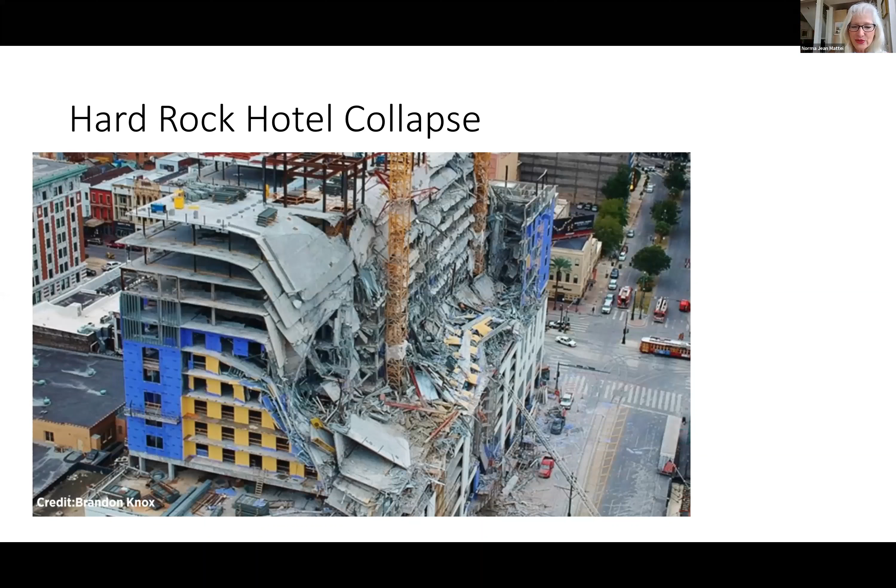So let's focus more on the Hard Rock Hotel collapse. Incidentally, just weeks after this disaster occurred in New Orleans, there was a similar construction failure. Both disasters ended with 3 people dead. It was actually, I think, Mustang Engineering's new headquarters in Katy, near Houston, a construction issue. I haven't followed it, but you really didn't hear too much about that failure, not the way that you heard about the Hard Rock failure.

And part of the reason why is it's in an area with a lot of tourists, and we all hold our cell phones up all the time. Tourists in particular are videoing as they're moving around because they're in a new town they're visiting. So this young man, Michael Del Mole, was driving down Rampart Street toward Canal. You see the Hard Rock on his left; he stopped at a red light. He's got his cell phone camera going, videoing his drive along the edge of the French Quarter. And he just happens to be driving at just the right time.

So let me play this video for you.

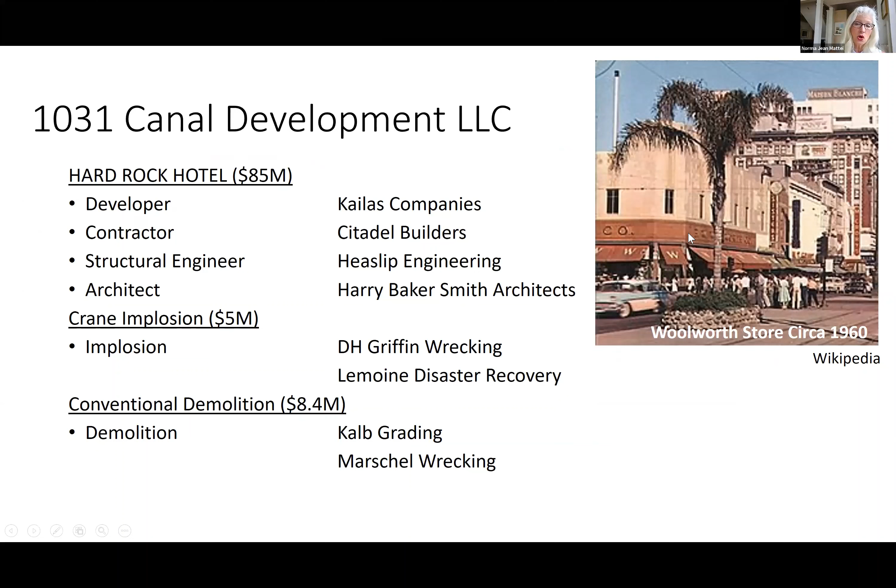And so 1031 Canal was going to be 18 floors, oh, I'm sorry, I said 160, it's 190 foot tall. 350 hotel rooms, over 12,000 square feet of event space. And the lower 7 or so floors was not steel, but reinforced concrete, a very different construction framing system. And that was the 400 parking spaces, some retail space on the first floor, and they were hoping to get a major restaurant on the prime first floor square footage.

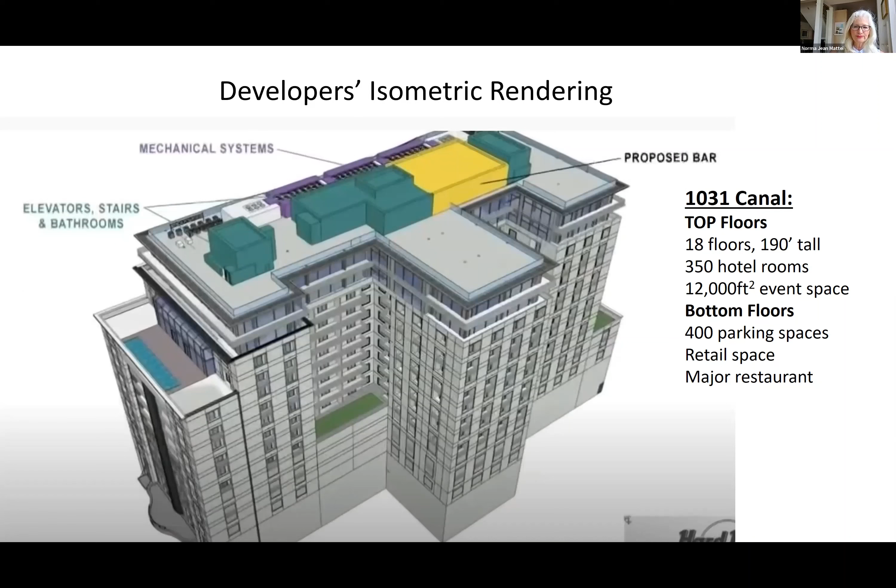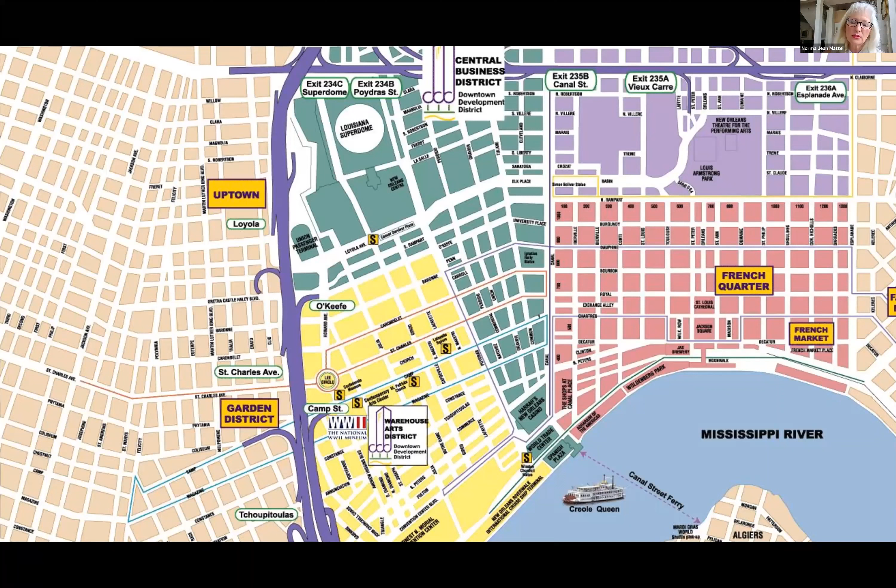And the historic preservation requirements are relaxed in comparison to those of the properties within the French Quarter that don't butt up against Canal Street. So there were some complicating factors in this location. So this happened in October. So we're dead in the middle of heavy convention season. And this is pre-COVID, because it was 2019.

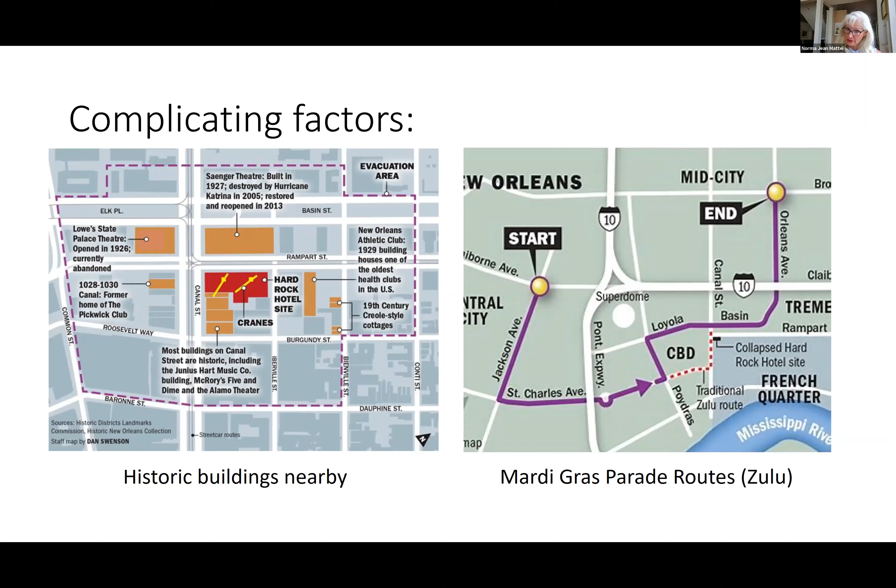So at the time of the collapse, there was a major production of Cats. It was running two weeks. So it had run the week before, Friday, Saturday, and Sunday. And the collapse happened on a Saturday morning. So thank goodness it did. If it had happened on a Sunday morning, we would have had the last matinee for Cats.

This posed a challenge because the collapse occurred on the Rampart Street side, and the Saenger Theater was shut down. So the second half of the Cats production was not able to be completed. And all of their sets and costumes were within the building. And they had to move and go to Atlanta for their next production. Ultimately, they were able to access their sets and costumes, but I'm sure they were really under the gun timing-wise, so that they could maintain their schedule for the rest of the year.

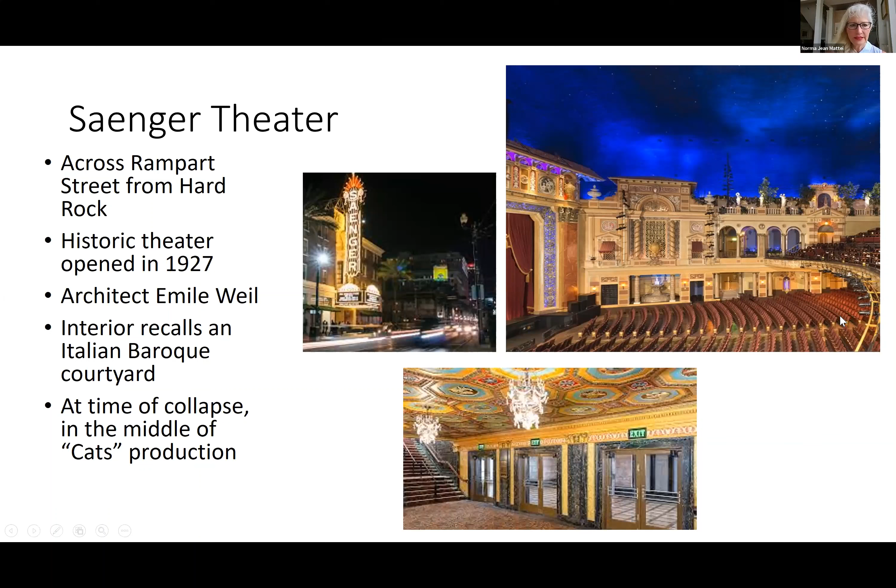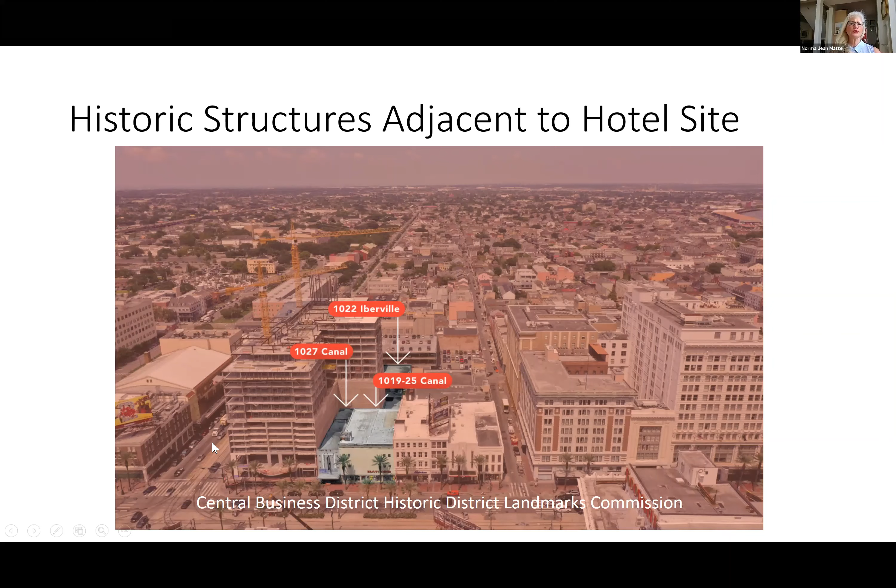And so October is well into our hurricane season. In fact, we're what, June 8th? We started June 1st as our hurricane season. It doesn't really end until November. And even though late August and September are typically the months that we see the most activity of major tropical storms and hurricanes, you can actually have a hurricane in October.

In fact, I got married in 1985, the tail end of October, and it was, what's the date? October 26th is my anniversary, and we actually had Hurricane Juan. So yes, we have hurricanes that can hit the city. Even storm fronts can bring with them associated high winds.

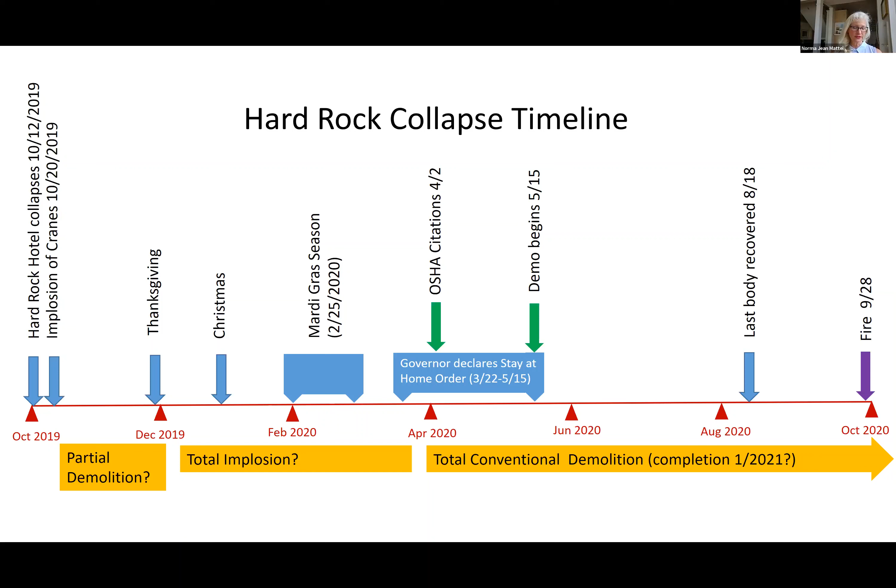The building is back in national news because there's a fire of construction debris. I do have a couple of photos. And then the January finish of the demolition is pushed back due to bad weather to March of 2021. And actually it was pretty close. It was the tail end of March, probably the first week of April, when Canal Street and Rampart Street were totally reopened, and you could walk up to a fenced area and just see a leveled site. So this is a picture of the cranes after the failure.

Let's first now talk about those cranes. So there are 2 tower cranes. They're out of the Morrow fleet. They're Liebherr cranes. One is 270 foot, one's about 300 foot. The east one, which is the one on, where's my cursor?

I'm losing it. Where'd it go? That's the only bad thing about a white.

Okay, there it is. So the eastmost one you see here, it's the one on the left side. The black line is totally upright, and the yellow line shows how much the crane is leaning. The other crane, a little bit shorter, it's on the Canal Street side. It is not as damaged, but it is swaying and damaged somewhat. So it's decided to take both of these cranes down.

The major cause for concern is, even though the cab is pretty heavy, those counterweights. So on the short horizontal piece, these counterweights run about 50 tons. So they're way up high, not easy to access, and you've got something extremely heavy that's just waving in what possibly could be high winds from a storm front, a tropical storm, or a hurricane. Let's get these suckers down fast.

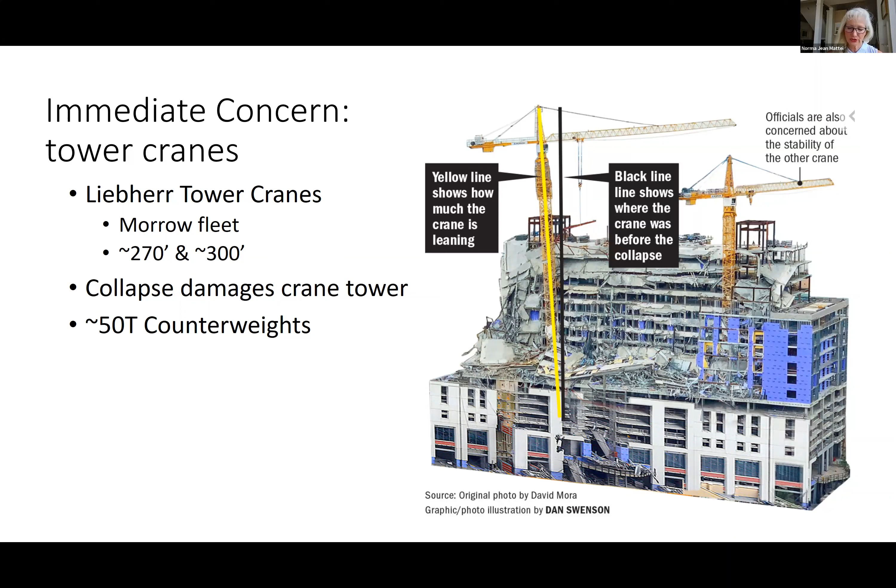So it took a lot of logistics to ensure that people were not outside. You warn people, but some people, especially when they are sitting on a rooftop bar in a hotel fairly close, are going to want to have their hurricane and watch the implosion as it occurs.

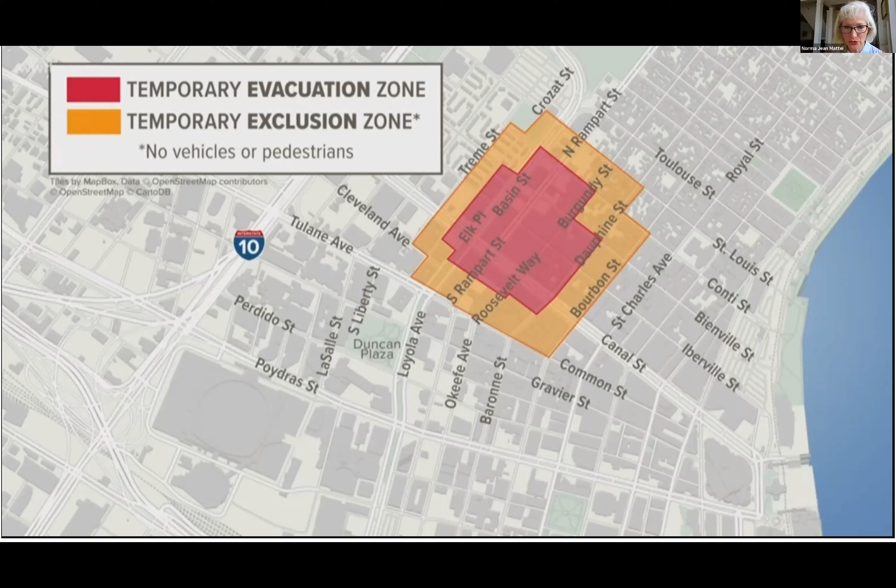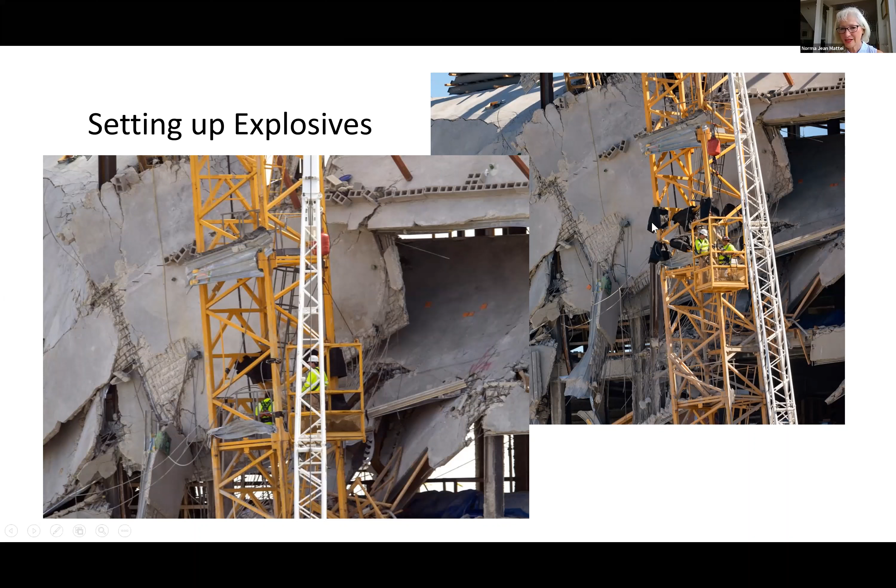These black packets, those are the explosives. So those guys are hanging from a cage next to a building that has collapsed, putting explosives on crane towers that are damaged. This is a little bit better of a photo. So here's the cage, the gentlemen that are in the cage, not on the tower crane, placing the explosives.

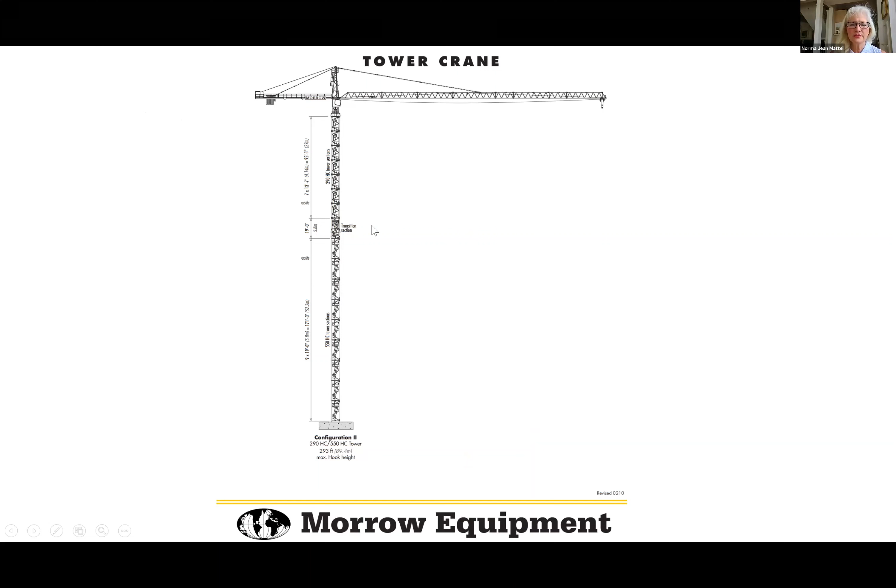So let's see where they put those explosives and see what the thoughts were. So explosives here and here to disconnect these tension members. This is a pin here right at the cab. So disconnect these because they wanted to make sure this counterweight came down, and this part's supposed to fold into the tower. This is supposed to disconnect it. It's supposed to go down, just like folding your umbrella.

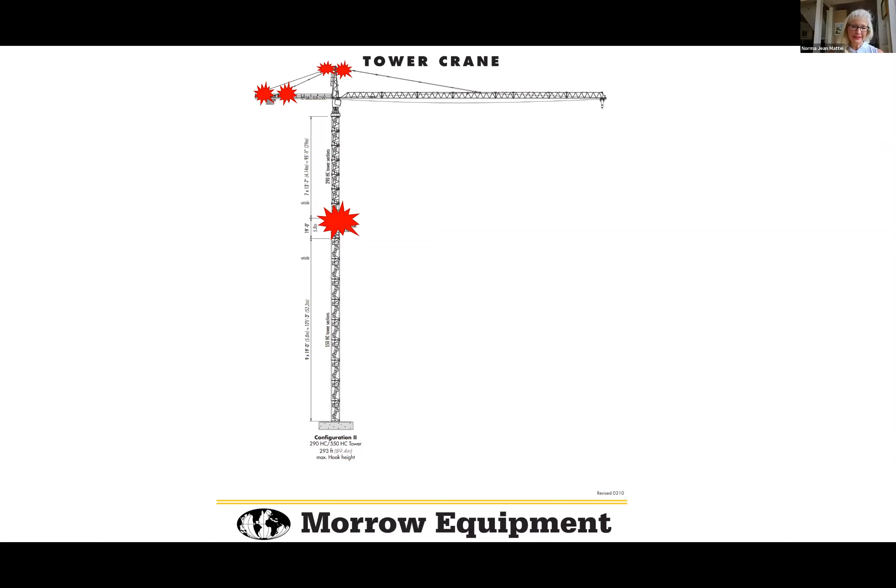I've got a video. It's going to run first from this view, and then it's going to switch and run from another view where you'll see the Canal Street crane, how its horizontal jib gets kind of caught up, hanging over Canal Street. So let's take a look at this video. It's a little long. So everybody's either glued to the TV or close enough to see, but safely, hopefully.

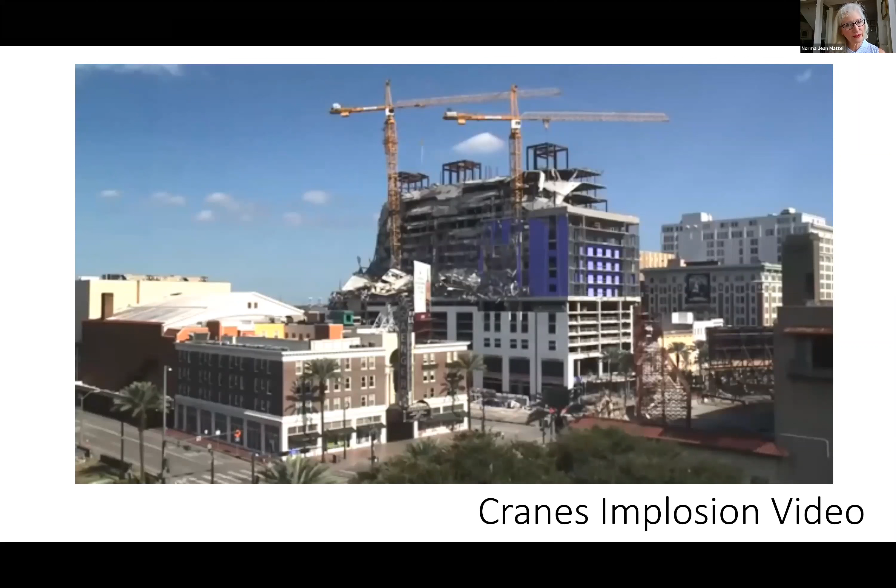There they go down. That's good so far. Oh, look at the east one. The top goes down as like a spear, and the Canal Street side, we've got this arm hanging, getting caught up on the moment frame on the west side and hanging over Canal Street. You'll see in a minute the implosion from that side.

So from a point of view of success, I think it's fairly successful. We've got the counterweights. They were actually flung into the building, so they caused more damage in an already damaged building, but you've got those very heavy counterweights.

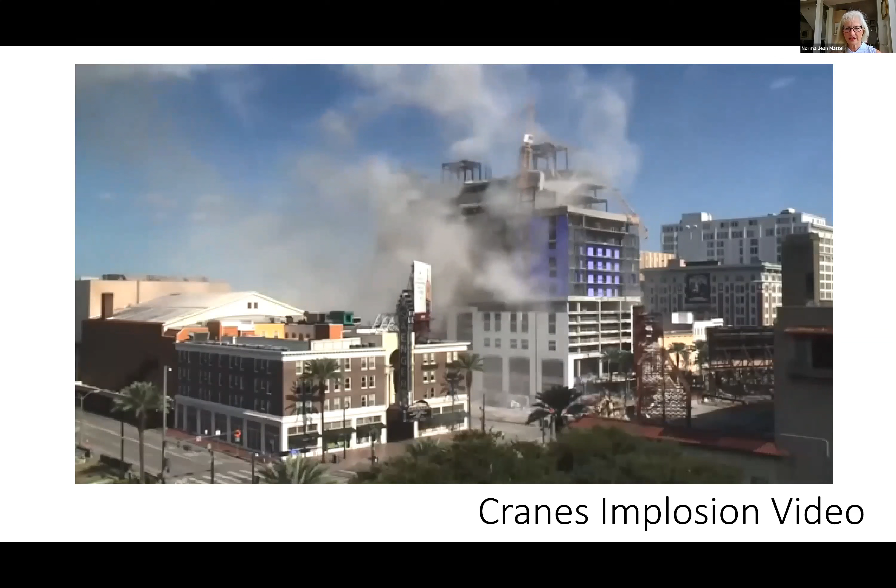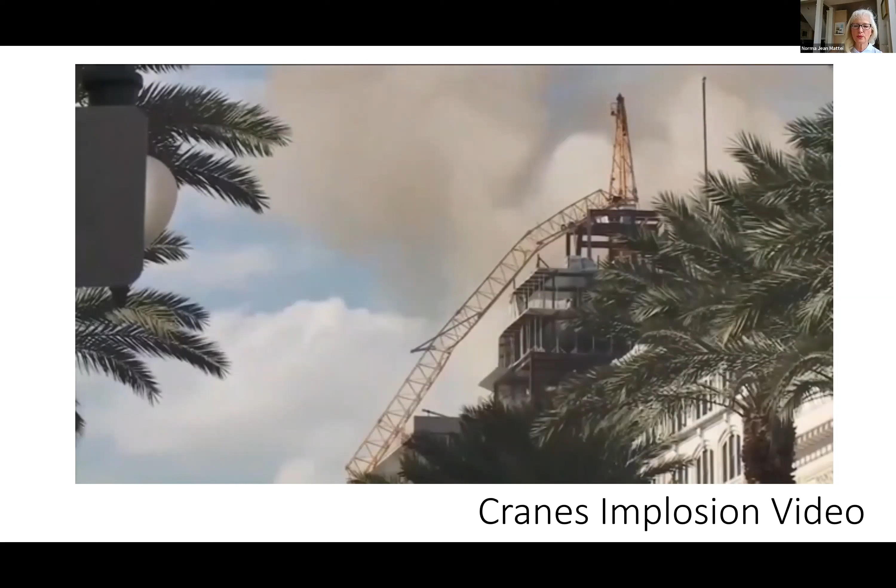So that's the Canal Street side. They did not want a lot of this to get hung up. They wanted those pieces to come down lower so that they could be chopped into pieces more easily and then trucked away to some disposal site, hopefully a reuse site.

So there's that westmost crane hung up on this moment frame of the steel framing, and this part is hanging over the building, over Canal Street, causing Canal Street to continue to have one side of it closed to traffic, and so that whole area is fenced off. So the area along Rampart Street and Canal Street, fenced off, no traffic still.

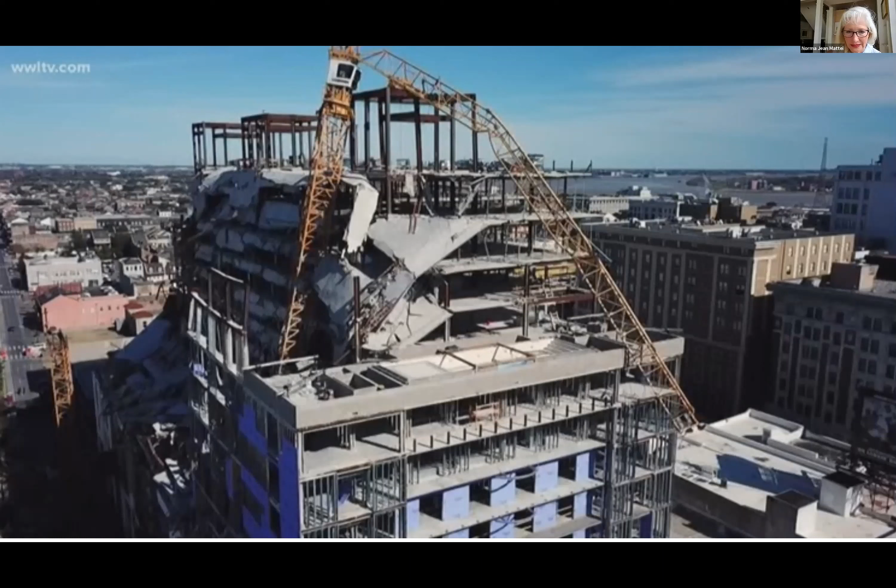So once it was decided to do an old-fashioned piece-by-piece demolition of the Hard Rock, the first priority was to carefully remove debris so that they could access the two remaining bodies of the victims that had remained for months in the site.

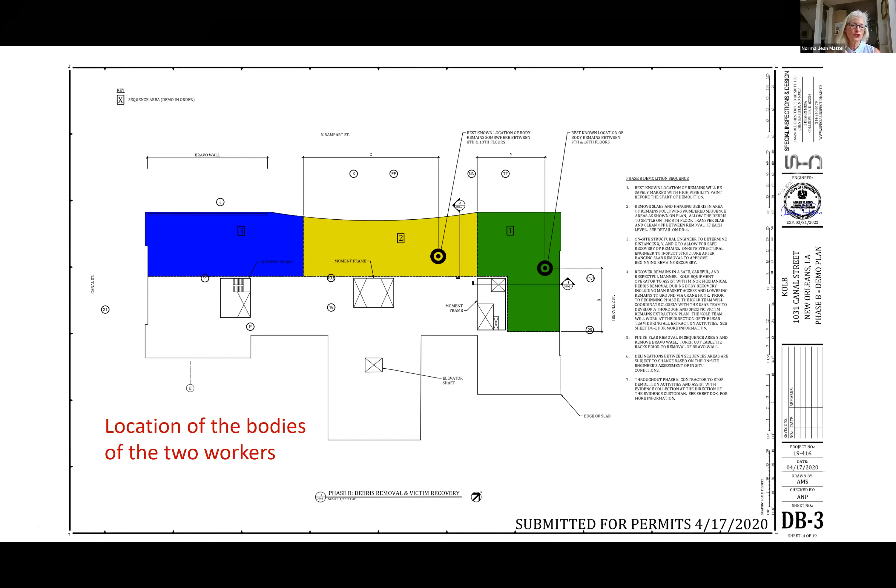So here's the Rampart Street side running at the top, and one body was located between the 8th and 10th floors, and another body on the 9th and 10th floors. So this one, they knew exactly where it was, but you couldn't access the body without removing so much of the structure, and it was deemed unsafe until they started demolishing the structure. The other body, they were not quite sure where it was.

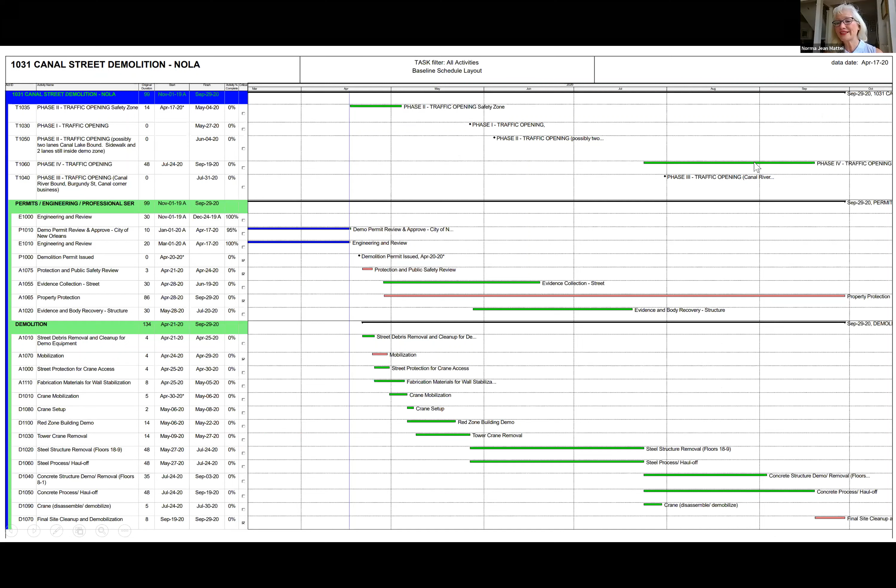So here's a timeline of the demolition. So you don't see traffic opening to Canal Street for quite a while. Let's move now to OSHA's preliminary citation. So let's talk about what possibly could have caused this issue with this structure under construction so that it had such a high-profile collapse. I'm not going to talk about all of the citations, just the ones that I think are pertinent to this presentation.

But let's first talk about OSHA. The Occupational Safety and Health Act of 1970 created OSHA. So Congress with that act created a federal agency whose mission is to safeguard working men and women. They do that by setting standards and enforcing them. They also provide for training and outreach. The act covers most private sector workers and some public sector workers in all 50 states and certain territories and jurisdictions.

So when I started looking at this, and because I'm a civil engineering professor at a local university that teaches structures, I became someone that the media would call upon to answer questions about the disaster. And so I started really looking into this a little bit more in detail than I ordinarily would have.

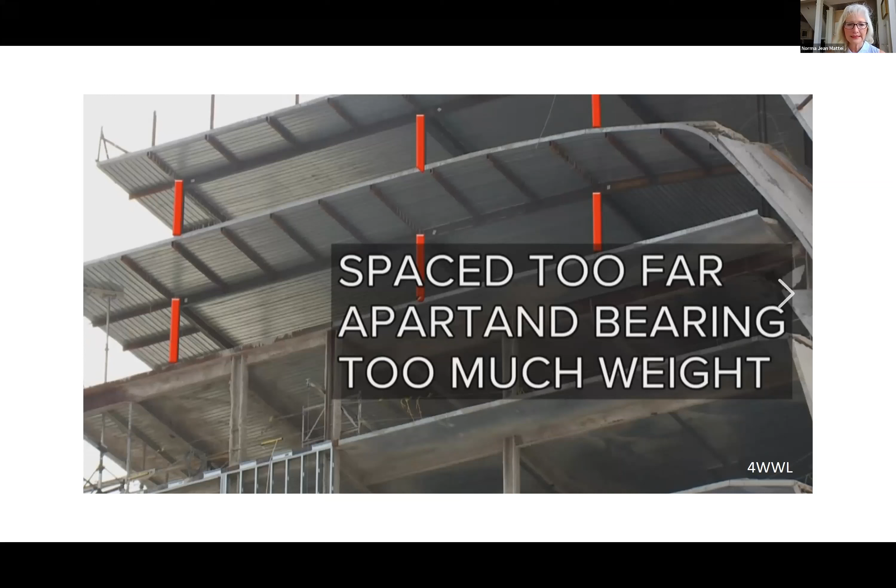This is another one. This is for the contractors, Citadel Builders. So talking about floors 9 through 18, that's the steel framing. Citadel failed to ensure drawings or plans for beam shoring that should have been on the job site. You can also Google this. I did not add the video here, but here's a shoring piece. So this is holding up an upper floor while the concrete for that floor is being poured.

And this is a Hispanic worker who took a video and sent it to a friend who then, after the issues with this building, sent it to a reporter, and it then made both local and national news. So talking about how the shoring was bent. Now, in my mind, that probably led to that citation for Citadel. Perhaps a factor in this series of failures that caused this collapse.

But what's more worrisome for me is this is a Hispanic worker. He saw something days before this collapse occurred. Did he talk to his supervisor? He doesn't speak English. Does his supervisor speak Spanish? And this is something that I don't know. I do know, from speaking with a reporter, this gentleman did not speak English. But were these workers legal?

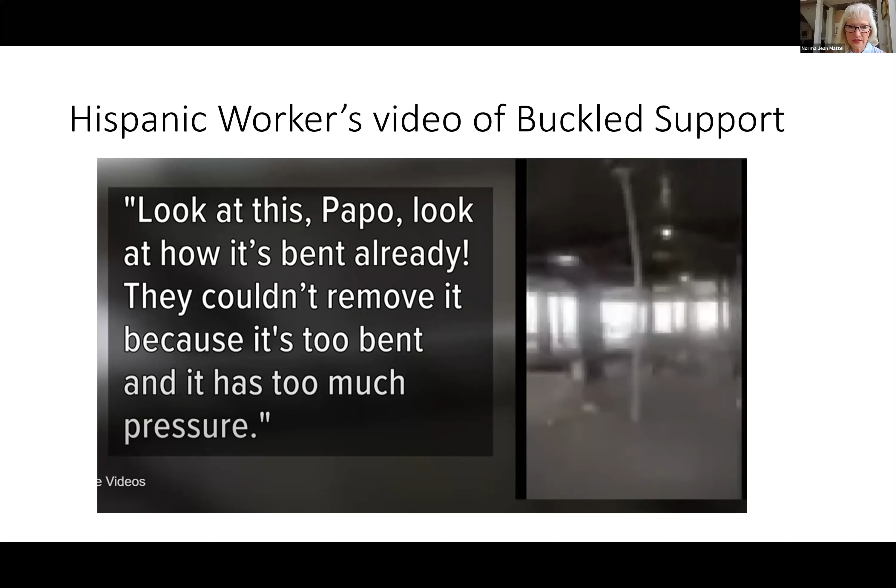So Suncoast Projects, here they're cited by OSHA because the employees performed steel erection activities on the steel beams on the 16th floor, and they didn't connect them to the columns on the 15th floor per the contract documents, and did not meet the specified load requirements.

So you read these, and if you're used to looking at the NTSB's comprehensive investigation reports for transportation, these read odd because OSHA is all about worker safety. Their job is not to come up with causal factors in a disaster. So they do sometimes do a more comprehensive report, but as I looked more and more into this, NIST is the agency that actually has the personnel that could do this, because OSHA is not an agency that is tasked with doing comprehensive investigations on why this happened. They're all about worker safety.

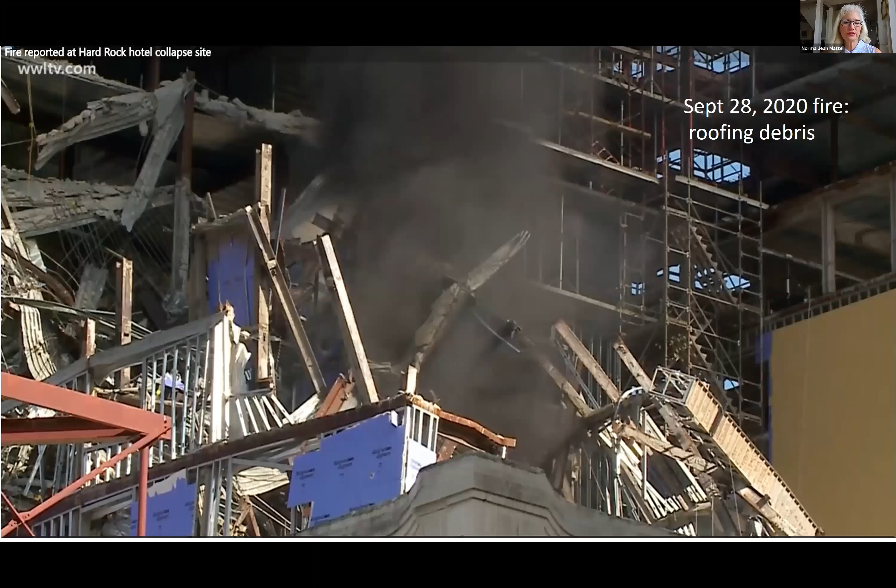So some recent issues I talked about. September 28, a one alarm fire. Here's the smoke, and you can see another crane out there assisting with the piece by piece demolition. They're taking down a lot of the steel and cutting it up. And someone had a torch cutting pieces of steel so they could be placed on trucks and removed, and construction debris caught fire. So here is a cage with our NOFD putting out that fire.

So end of year one conditions, as far as the demolition, they thought that the demolition would be completed by January 2021. But by October 2020, it looked like it might be extended, and so the revised estimate of completion was March, and actually the last truck of debris was removed in early April of this year, 2021.

At this point in time, the City Council was urging the City Planning Commission to consider revoking that conditional use permit, that permit that allowed the developer to go beyond 70 feet to that 190 feet. And there's recent talks because now the developer has a cleared construction site. He cleared those 3 other buildings, those 3 smaller historic buildings that did not have actual historic designations. Come to find out, some of the folks that are involved in part of the LLC have ownership of those sites. And so now we have a larger footprint.

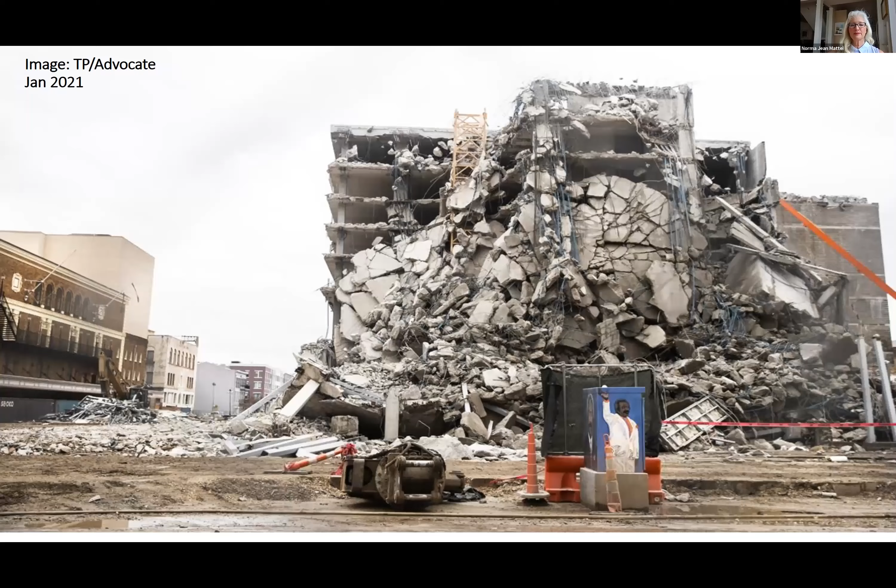So this is a photo of it around January of this year. This is a photo March 30th of this year, just that little bit of debris left. And by the first week of April, second week of April, all you had was a cleared site.

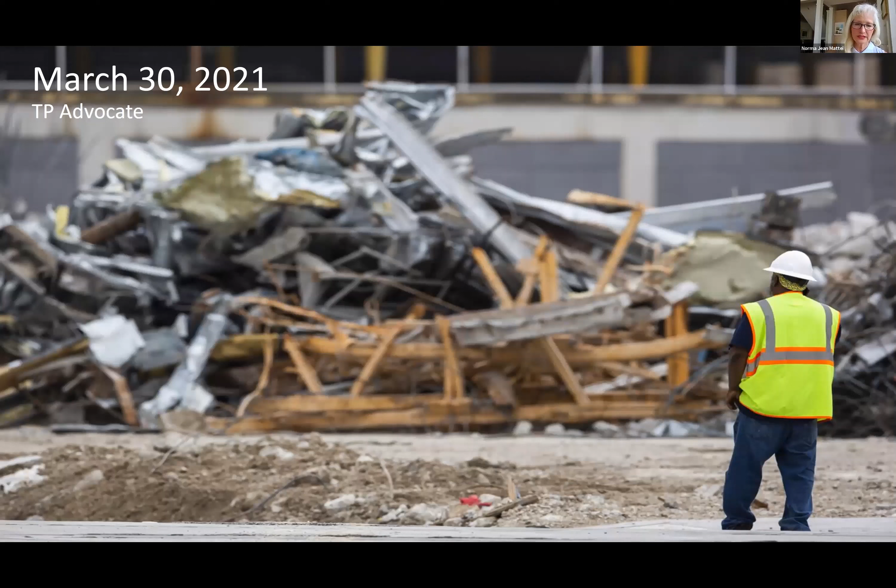So I'm going to move to, oh my goodness, I'm over time. I've got 3 minutes.

So this got me because I was always under the impression that we had a more intentional way of learning from failures, and then from lessons learned, making changes to standards. I got involved with CROSS US. The international organization is based in the UK, but it's based on the US model used in aviation.

So the FAA has a separate entity where people involved in aviation, if they see a potential or a near issue, a near miss or a failure, they can confidentially report this to this entity that then will advise other agencies and associated organizations involved with aviation of things that might be trending that need to be changed in order to keep workers, pilots, the flying public safe.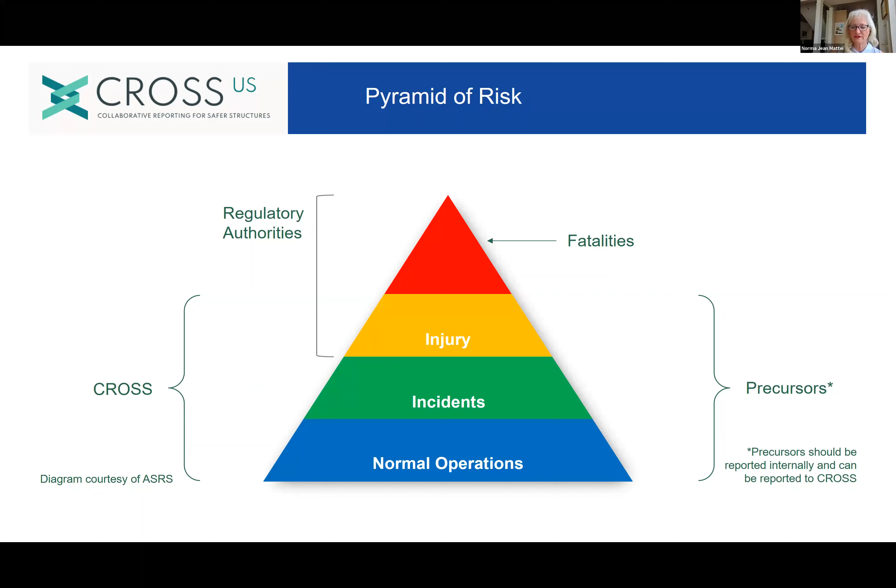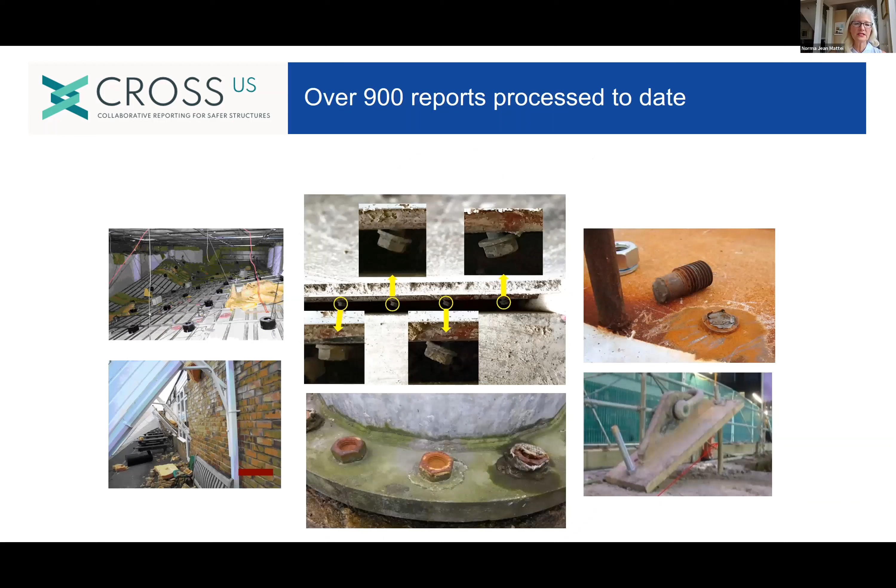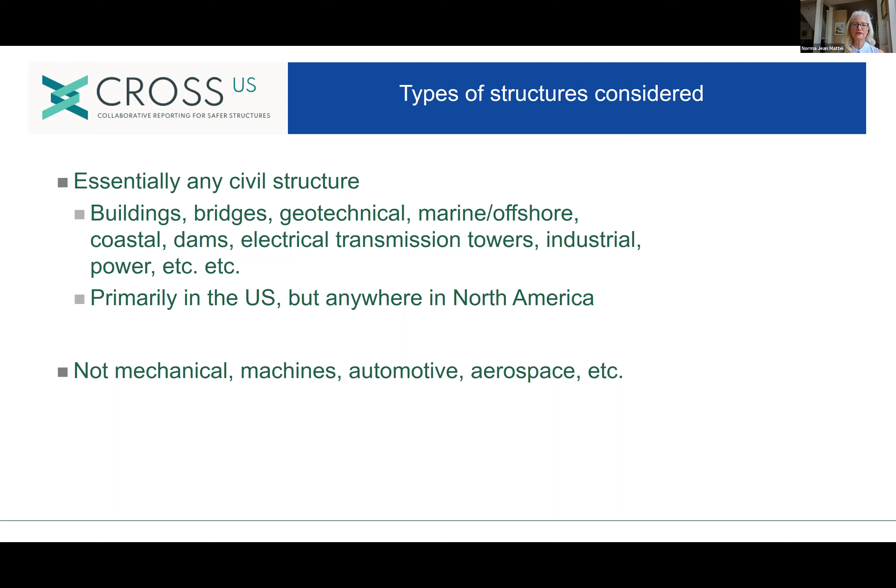So far, not mechanical, not machinery, not automotive, not aerospace, but if it's any civil structure, and we've added fire to that, if you are aware of issues, this is the entity where you can make those reports confidentially and then make a difference so that perhaps that type of issue won't come up in the future. So that's all about public safety.